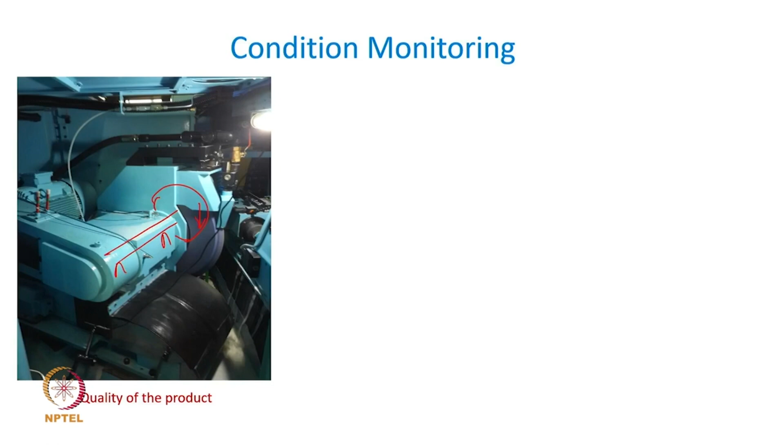The other example is of a defense equipment. This equipment has many mechanical parts: engines, transmissions, gearboxes, pumps, and so many critical machinery equipment inside, which if they deteriorate in their quality of operation, then the reliability of the mission being undertaken will get compromised.

So, from the reliable operation and the success of the mission standpoint, these vibratory systems or equipment acting like a vibratory system have to be kept in working condition or the most effective operating condition.

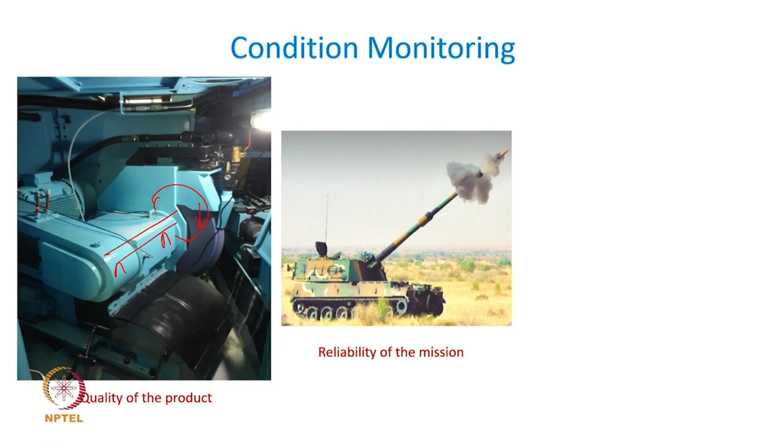So this is a domain within vibration engineering, where we may use, among other things, vibration as a significant and important parameter for keeping the condition of this equipment up and running, to the best of the possibilities.

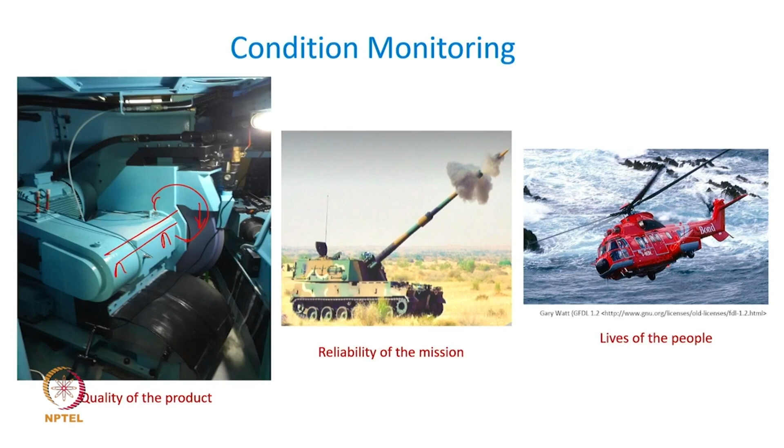Now, what are these condition monitoring parameters which we can use for ensuring the machinery or equipment works perfectly? There are various parameters, like an aural parameter. For example, in an automotive engine, if you take your vehicle to the garage, the mechanic will immediately start it and look for some audio symptom, listening to the sound coming from the engine to detect any anomaly in the system. So sound is one parameter.

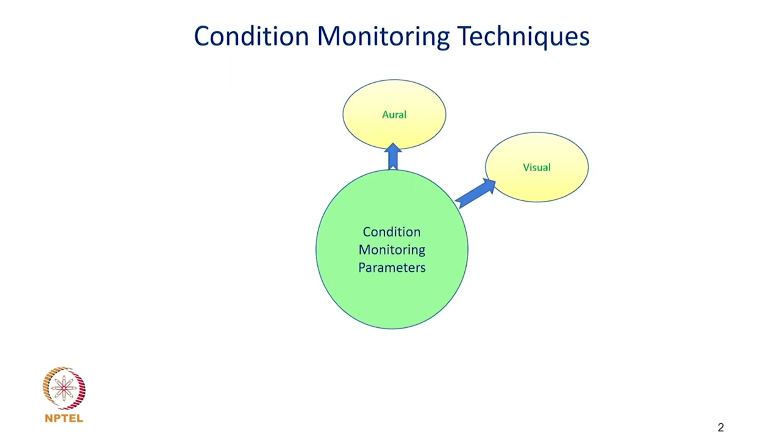Sometimes some equipment have the possibility of detecting damages using simple visual observation, like using boroscopes in the heat exchanger or furnaces, where visual observation is good enough to maintain the condition.

The other is temperature. So if you take the bearings, the temperature will tell you whether the condition is appropriate or deteriorating. Wear debris, either from the bearing oil or from the gearbox oil—if you drain out the oil and look for the debris particles, that can indicate whether the wear is abnormal in the gearbox or in the bearings, and that will tell us the health or condition of the equipment.

Vibration is one of the most convenient and important diagnostic parameters, where the health of the machinery is diagnosed based on the quality of vibration. We will discuss this parameter in more detail.

But there are of course other parameters such as acoustic emission, or operational variables such as pressure and temperature of the equipment. Sometimes speed, for example in power stations, the vacuum in the condenser, or the power being generated, are operational variables used for tracking the condition of the equipment. So these are just a glimpse of various parameters which can be made use of in monitoring the health of the equipment.

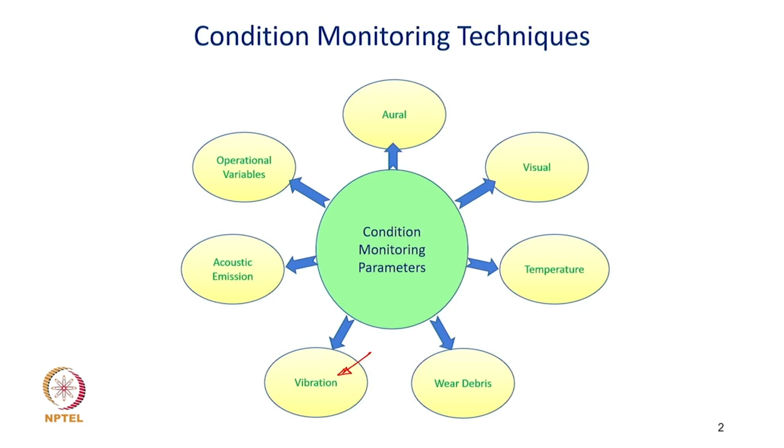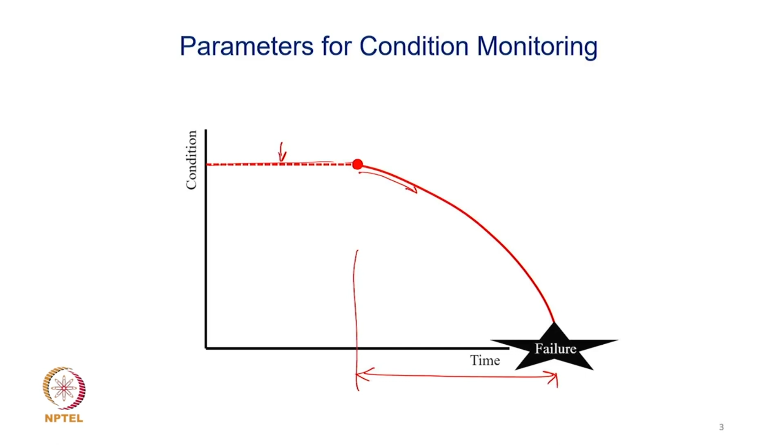It is possible that by employing some of the parameters we have seen in the previous slide, one can keep track of this deterioration. So among the total time or opportunity for corrective action, if you rely on noise, it may be too late to figure out the damage.

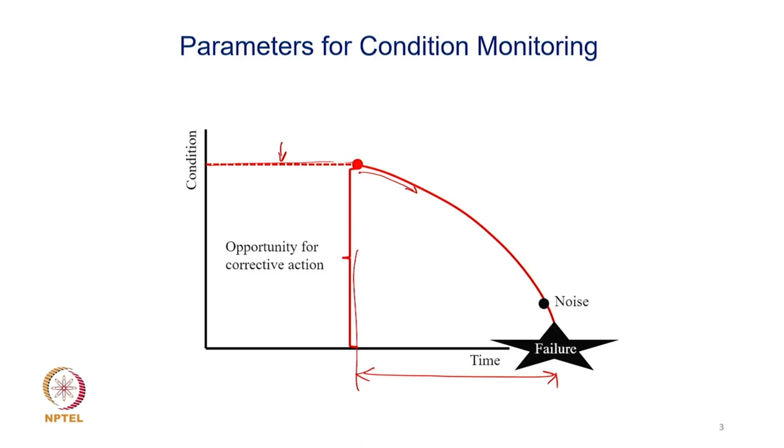The noise starts emanating generally a little later in the progression of the damage, compared to other parameters such as visual inspection, temperature changes, and maybe lubricant analysis for wear debris particles or lubricant quality.

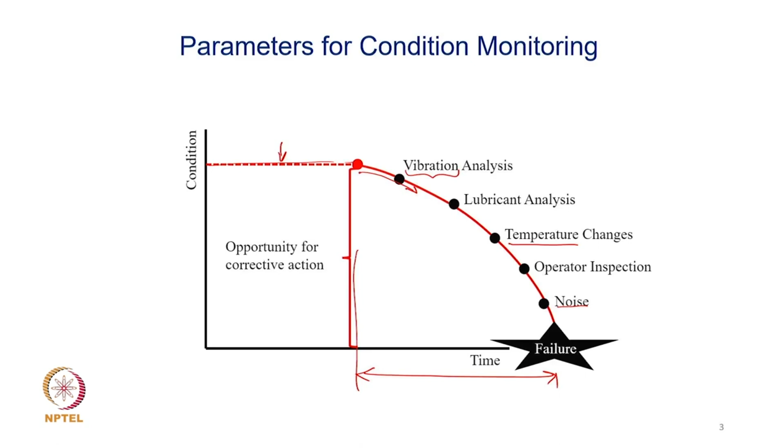But it has been observed that vibration is a parameter that gives you early warning symptoms of any change in the condition of the equipment, long before temperature shows up or long before noise gives its indication. So in general it has been observed that vibration as a parameter is an important one to track the condition of the equipment.

Now let us focus on how vibration is going to give me an idea about the degradation or deterioration of the condition or health of the equipment. I am just taking a simple example of an electric motor.

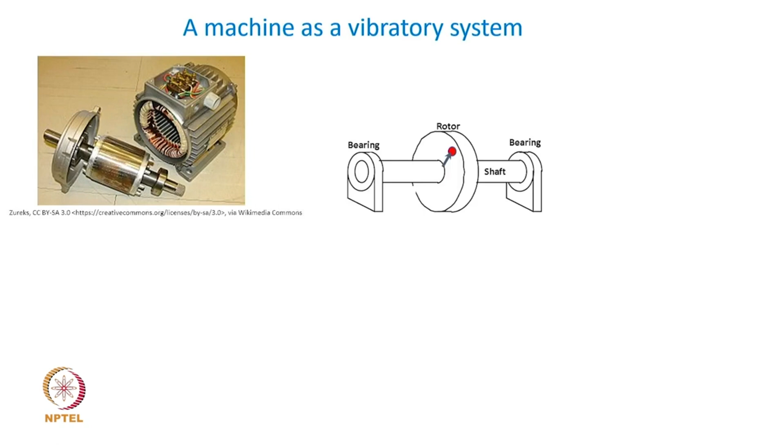This electric motor has a rotor, and the rotor is supported on two bearings, and this rotor spins inside a stator winding, and these bearings basically support this spinning rotor. So as a vibratory system, this rotor can be treated like a spinning shaft supported on bearings, and we know that a simplified way to represent this is in the form of a vibratory system.

So a shaft plus a rotor, if the shaft is big enough in terms of its diameter compared to its length, can be treated like a rigid one without any deflection, and the bearing stiffness can be treated as the spring element in the vibratory system. The damping in the bearings can be simulated or assumed here as the dashpot element for our typical single degree of freedom vibratory system.

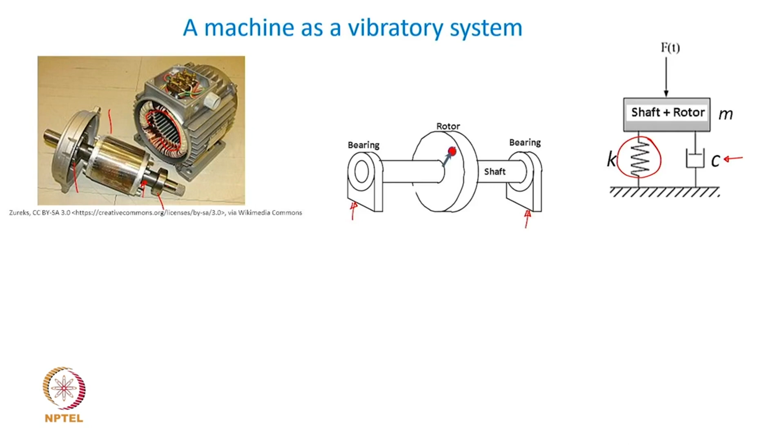The inherent unbalance in this entire rotor can be the excitation force to the vibratory system. So the force acting on the rotor is going to be the rotating unbalance in the shaft. In addition to that, there will be magnetic pull generated because of its operation in the stator winding. But in general, we can treat the excitation force as coming from the rotating unbalance.

Now, if this is your vibratory system which has certain stiffness, mass and damping properties, I can write the governing equation of motion for this vibratory system, as we have done many times now: m x double dot plus c x dot plus k x equal to f of t. Now, when things are going fine and everything is working all right, the system is in the best of its health and condition, this equation describes the dynamics of this particular system.

Now, we would like to look at what will happen if the condition deteriorates, but before we do that, we know that if this f of t is the excitation coming from the rotating unbalance case, then the response is going to be given something like this.

You already know that the response to a harmonic unbalanced excitation force is a pure harmonic signal as this, and the amplitude can be obtained from the parameters of the vibratory system as well as the excitation system properties like the unbalance. But this is going to look like a healthy condition vibration of the rotor, which I can measure by recording the vibration of the shaft coming out from there.

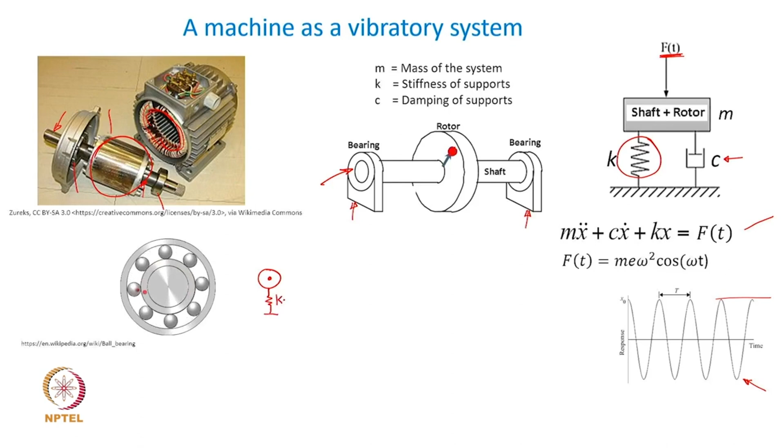But let us look at this system a little more closely. One of the most common elements of this vibratory system which generates faults or deteriorates its condition is the bearings. So if I consider one of the two bearings here, it is possible to see that this rotor is supported by the bearing, which I am defining as the spring I have used here.

Now this bearing itself is going to have a very little or minor fluctuation in its value based on the ball position. So if the balls are located like this about the vertical gravity line, then there will be some stiffness based on the ball positions.

This happens all along the circumference. But if this ball comes to this central position and the other balls are located like this, the stiffness of this bearing changes. In short, the stiffness of the bearing is going to fluctuate based on the position of the orbiting balls, and that small fluctuation in bearing stiffness creates excitation to the vibratory system.

How is that going to happen? We all the time assume that the bearing stiffness is constant, but I can use what is known as the varying compliance effect of the bearing. There is some mean stiffness value, but there will be some very little perturbation or fluctuation in the stiffness value. So there will be some delta k, which might fluctuate with a certain frequency omega f. So instead of constant k, I am going to have a varying stiffness, equal to f of t.

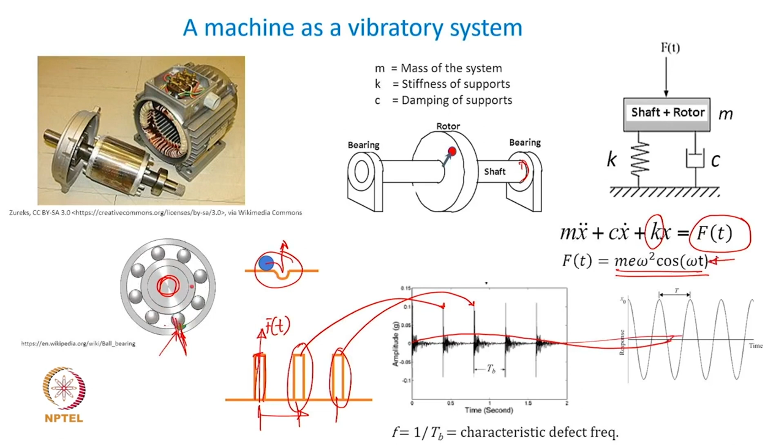So what is going to happen because of this? The response is going to be impulsive for a short period of time when this particular impulse acts. Each of these impulses corresponds to each passage of the ball through the localized defect. Therefore, in general the response could have been a harmonic response because of the rotational unbalance, but now that gets modified into the form of an impulsive, high frequency vibration response.

Because the geometry of the bearing is such that the time gap between successive balls hitting this particular local defect is related to the geometry of the bearing, this repetition period after which these impulses are generated can be obtained from the geometry of the bearing, and it's called the characteristic defect frequency. So by looking at the time domain data from the measured vibration signal, one can easily identify whether the bearing is healthy or not healthy.

The point here is, you still have the same basic vibratory system being modeled, and some parameters of this vibratory system, mostly the stiffness or the excitation function, will get altered by the presence of many of the mechanical defects which typically appear. So this is just one example of a rotor bearing system as a vibratory system.

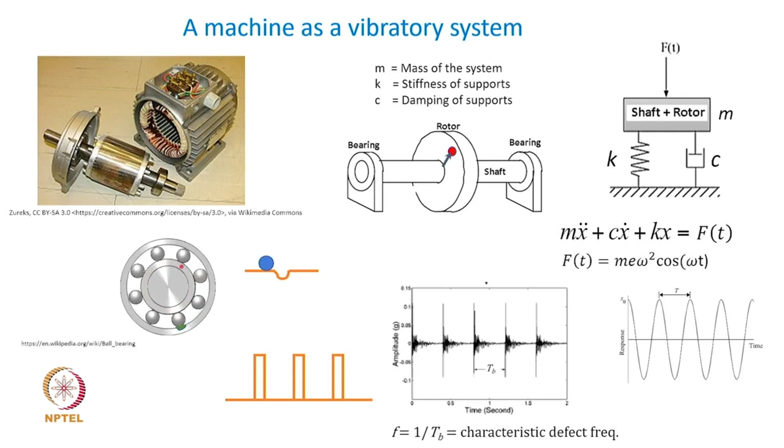How condition deterioration in one of these elements of this vibratory system generates a different kind of vibratory response, and by detecting the differences in the response, one can identify if there is any fault and what type of fault it is.

The other example is that of a gearbox or geared rotors. You know that the gears are basically teethed elements engaging with each other and transmitting the torque and power.

So if you consider one such pair of gear teeth, they are going to engage all along from the tip of the gear tooth to the root of the gear tooth. So it so happens that depending upon where the teeth are in engagement, whether at the tip of the tooth or at the root of the tooth, the stiffness is going to be different.

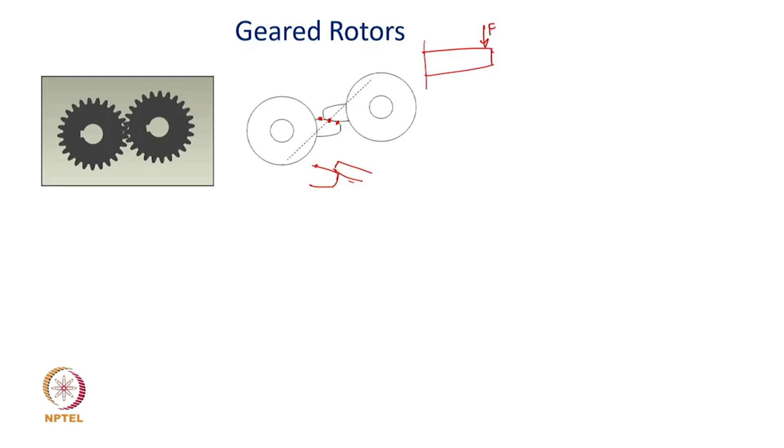It is very simple, because if you consider the tooth to be a cantilever, if you apply the force here, the corresponding displacement is going to be larger. But if you apply the same contact force closer to the root of the tooth, the displacement is going to be much smaller as compared to when the same force was acting at the tip of the cantilever.

So this force to deflection relationship generates the stiffness, which is not going to be a constant value based on the engagement of the tooth at different locations all along the contact profile or that length on the flank. This effective stiffness of the tooth is going to be different at each instant of time during the entire contact cycle. So basically, you may consider this contact to be in the form of a stiffness and damping.

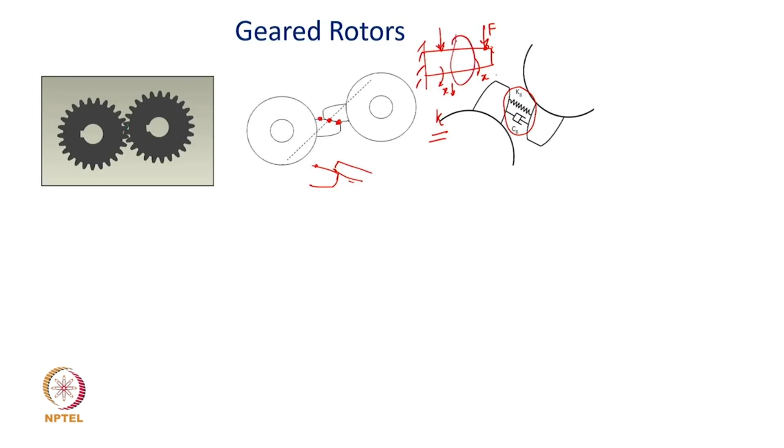Damping will come because there is always a sliding action between the two teeth, as we already know from the kinematics, and that friction, if lubricant is not there, will give Coulomb friction damping. If lubricant is there, then there will be some viscous damping due to the sliding motion, except at the pitch point.

Now, the point is, because the stiffness of the tooth is different at different times, that stiffness can still be modeled like a gear mesh stiffness kg, and then I can write the governing equation of motion of this particular geared rotor system. This is going to be in theta terms, but I am just giving a representative equation.

The most important part in this case is that since the contact point is sliding from the tip to the root and back again, this stiffness is not going to be a constant stiffness which we typically use for our general linear vibratory system. The k is not going to be constant, it is going to be a function of theta or time, quite similar to the bearing case where the stiffness was not constant.

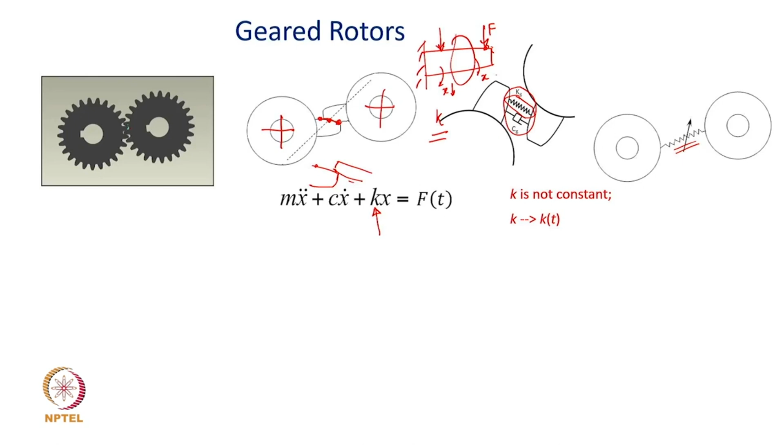It can be shown, though this is not the point of discussion, but you can find out from literature that during one contact segment - meaning when one pair of teeth starts engagement until the contact cycle completes - if the contact ratio is more than 1, the stiffness of the gear teeth changes in this way, over one cycle.

Because of this, as discussed in the previous case, this k is not going to be constant. You can treat this k to be a constant term, a mean value, plus some fluctuating component, which is kt, the fluctuating component. So if I keep mx double dot plus cx dot plus this constant part on the left hand side, then the right hand side is going to be this kt into x, which is basically arising out of the fluctuating or varying part of the parameter k, and that is why this system is called a parametrically excited system.

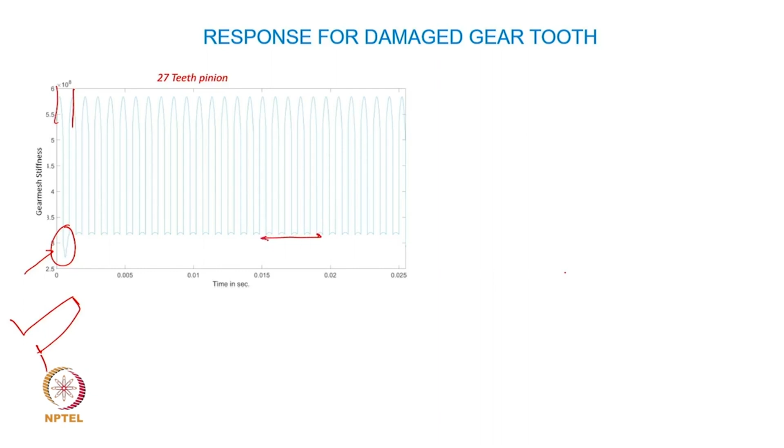If a gear having 27 teeth has a fatigue crack on one of the teeth, that crack can generate a dip in the overall mean stiffness value, because the crack makes the tooth weaker. So even if only one tooth has a crack or any flaw, the mean stiffness level drops at that particular engagement cycle of that tooth, while the rest of the teeth are perfectly healthy and generate the kind of stiffness variation discussed earlier.

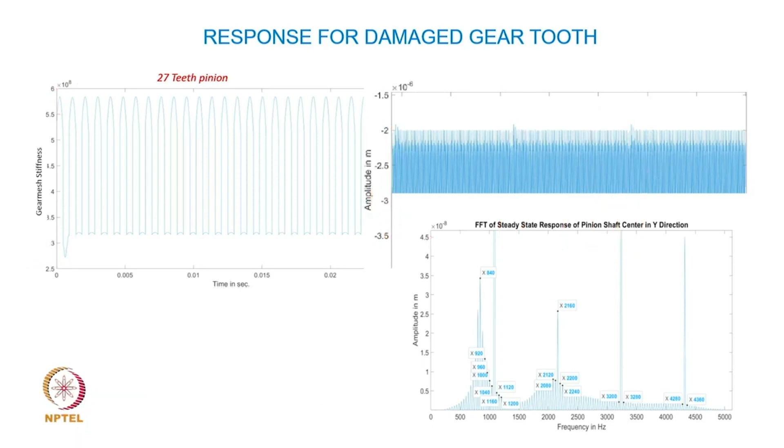Now if you take the Fourier spectrum of this time domain data, you get the frequency domain signal, something like that. Don't worry too much about how to get that FFT - some of you might already be aware of how to get the frequency spectrum from time domain data. But the point is, these periodic perturbations or signal changes that happen because of the defective teeth generate a peculiar vibration response pattern which is observed in this frequency spectrum.

If the defect is not there in the teeth, the general vibration signal would look like these frequencies only, and ideally this is how the spectrum will look like. But because of the defect in some of the teeth, you can see that these kind of sideband vibration frequencies will appear, which can be used for diagnosing the health of the gear.

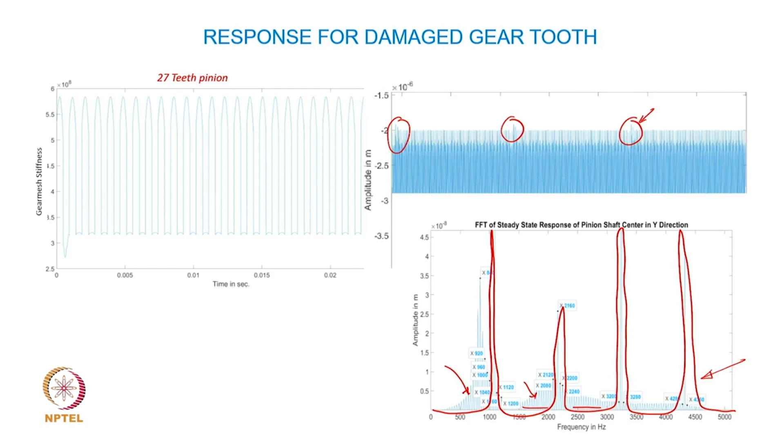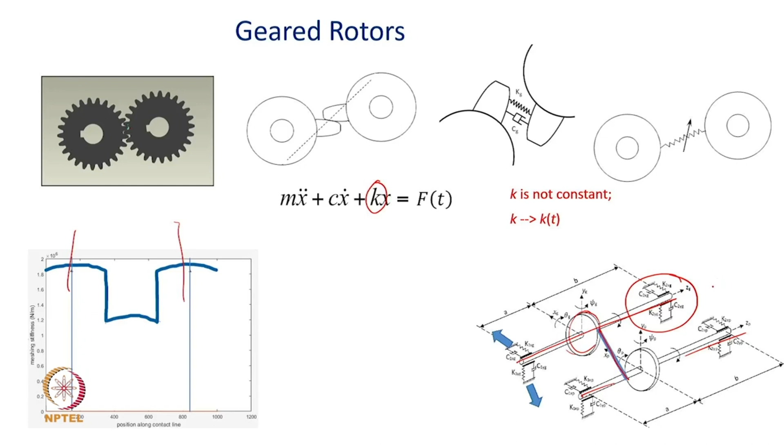Now the whole purpose of telling you all of this is not to teach you details of the health or the diagnostics or the dynamics of the geared rotor, but to show you a glimpse of how vibration as a signal feature can help diagnose the deteriorating condition of a vibratory system like a gearbox. This in no way demonstrates or discusses in detail the dynamics of the vibratory system of a gearbox, but only shows how vibration, which we learned through elementary theory of vibration, can be extended to study the dynamics of complex mechanical vibratory systems, and that can be used for diagnosing the health of mechanical equipment.

The other example I would like to give you is a fatigue crack. A fatigue crack can appear on the shaft due to large fluctuating stresses, bending stresses in the shaft, because of flexible shafts being used with high speeds and higher loads, under an aggressive environment like high temperature conditions, and that creates a fatigue crack.

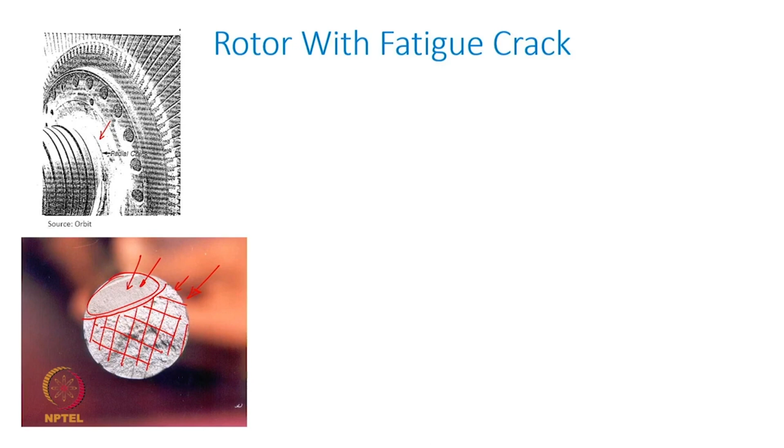When such a fatigue crack exists, at this particular cross section of the shaft, only this area is bearing the load. This part of the total cross sectional area does not contribute to the stiffness or load bearing part of the cross section. So only this area of the cross section bears the load, and therefore the stiffness in this localized cross section reduces significantly, creating a change in the stiffness value.

If you consider this to be a horizontal shaft under gravity loading, and this kind of crack exists in the cross section, as you can see in this exaggerated view, the crack will open the two areas and create an open area here, which means that only this area of the shaft is bearing the load. The crack is wide open.

This crack is assumed to be on the underside, and because of the tensile forces on the underside of the shaft, it will open the crack there. But when the shaft rotates by 180 degrees, the same crack will go to the top, but because of the compressive loading on the top side of the shaft, when the crack goes to the top side, it will get closed. This is shown here.

At theta equal to 0 degrees, on the lower side, this crack is going to be completely open. But the same crack, when the shaft rotates by 180 degrees and goes to the top side, the compressive loading on the cross section will close the crack and the entire surface will bear the load.

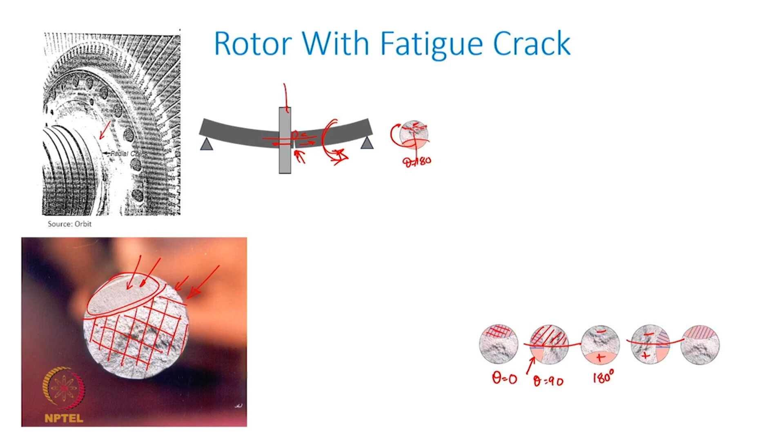If you consider this to be 180 degrees, the rotor is always rotating in this direction, and after every 90 degrees of rotation, the crack area will continuously open and close. At 180 degrees, where the crack is on the underside, the crack completely opens. With further rotation, half the crack, which is under the compressive region, and the other half in the tensile region, half of the crack is going to be closed, and then it is going to be completely closed.

Now, using this to show how the stiffness of the shaft changes as the crack changes orientation as the shaft rotates: at theta equal to 0 degrees, the crack is completely closed, like an uncracked rotor stiffness, meaning the effect of the crack on the stiffness is not there at all. If the crack is half open and half closed, the stiffness drops to a certain value, and when it is completely open under tensile loading, the stiffness drops to a significantly low level. As it rotates further, half open half closed, it has a certain stiffness value, and then again back to completely closed condition, the stiffness returns to the same as the uncracked shaft.

The point is, had the rotor been without any crack, an intact rotor, the stiffness does not change at all. It remains constant irrespective of the rotational position of the shaft.

You can agree that if the shaft is uncracked, it will have the same stiffness all through as it rotates, so the stiffness does not change. But because of the crack opening and closing continuously and gradually during a rotation, the stiffness of the shaft fluctuates like this, which again brings me back to our governing equation of motion.

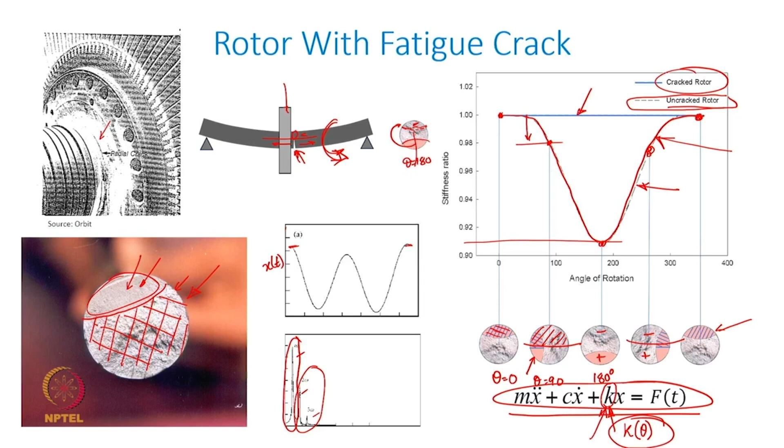This is all to show you how every mechanical vibratory system is defined or characterized by a governing equation, and the majority of mechanical faults somehow either modify the forcing function or the parameters of the vibratory system like stiffness or damping. But 90+% of the time it is the stiffness which gets modified, and that modified stiffness generates a slightly different kind of vibratory response.

When you compare the original healthy condition response with the changed vibration response, the difference basically will tell you what could be the reason. First, it establishes that there is a deterioration in the condition of the equipment, and then by analyzing that signal through a variety of means, one can identify the possible fault in the system.

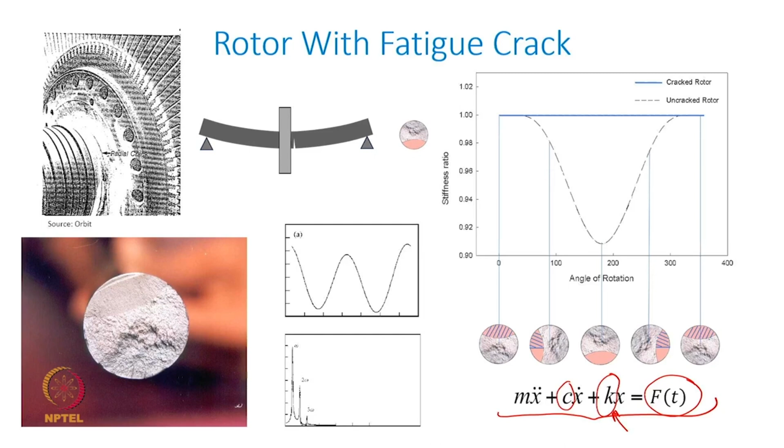But most mechanical systems, when they undergo some deterioration in their condition, will give rise to a specific vibratory response which is characterized by certain parameters, and using those parameters one can diagnose the condition of the equipment. But at the heart of it, it again is the basic vibration theory at work.

So just to wrap up this part, there are of course n number of different kinds of faults in mechanical vibratory systems. We simply cannot get into the details of each one of them, and this particular topic has been taken just to highlight one possible application area of vibration theory.

So if there is increased unbalance, we know the first harmonic or rotational frequency related response increases. If you have misalignment, higher harmonics will appear because of the misalignment in the coupled shafts. If there is bearing wear, the response again would change in the form of a changed orbit plot. Rolling element bearings we have already discussed, and we have discussed how gear tooth damage will cause a different kind of vibration response.

And if the rotor, when rotating, is surrounded by a stator and hits and strikes the stationary part, there is going to be a peculiar vibration pattern generated. All of these will generate specific vibration symptoms which, if properly analyzed, can definitely point to a certain flaw, which is why this particular field is exciting and extremely dynamic. It is multidisciplinary, and a lot of research is still going on in increasing the robustness of the diagnostics.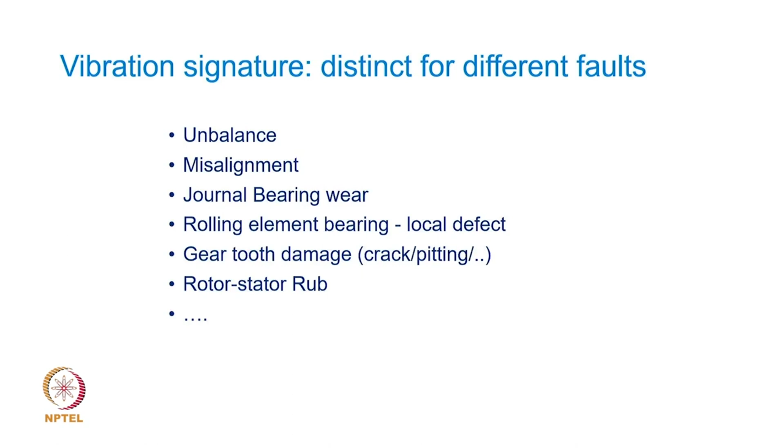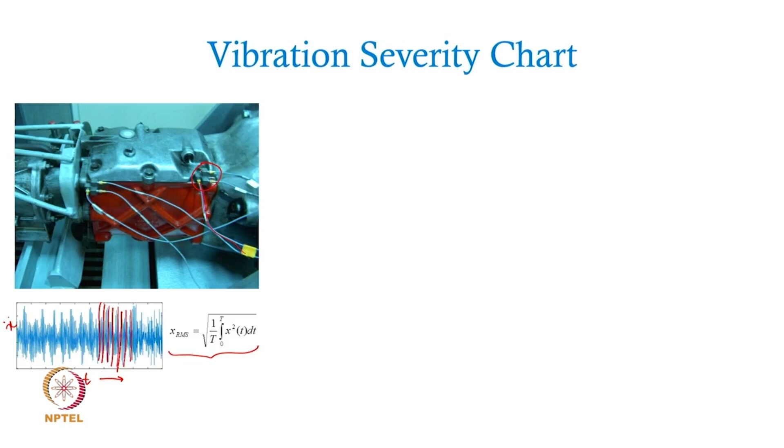Once the root mean square value of the vibration signal recorded on the equipment is obtained, then using the ISO standard one can categorize the equipment as operating in healthy condition or not. Depending upon the capacity of the machine, there are prescribed values of the vibration velocity RMS.

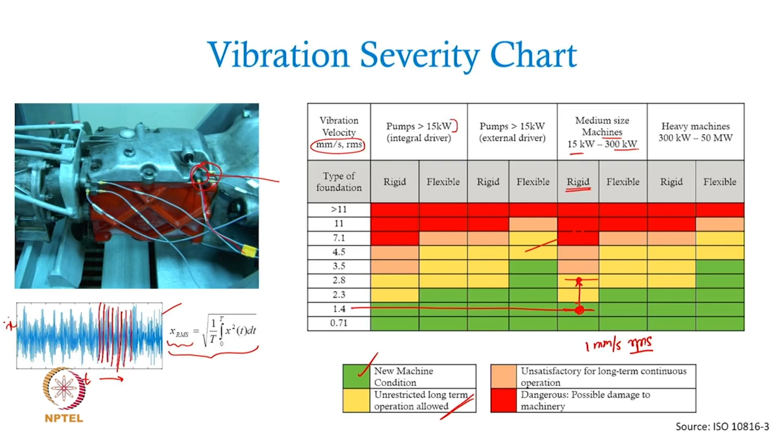So the summary of this lecture: we discussed how various physical parameters can be used to monitor the health of machines, and among these, vibration has been considered one of the most promising parameters. We deliberated as to how different machine elements such as bearings, shafts and gears produce vibrations that are very peculiar to the defect they have, so the vibration response change can be directly correlated to a fault brewing up in the system.

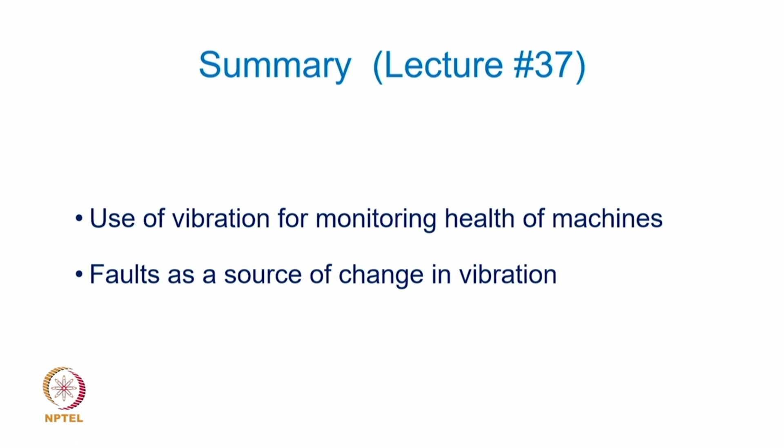And that is what we discussed: faults as a source of change in vibration, and a careful deciphering of the changes in the vibration signature can act as a diagnostic approach.

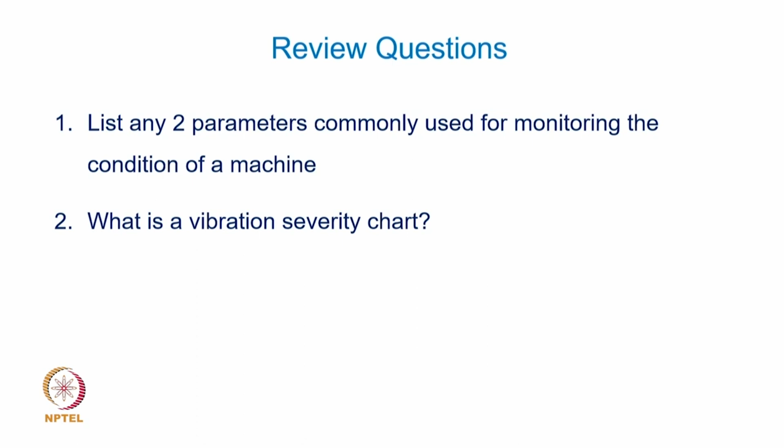The review questions based on today's lecture, and here are the answers.

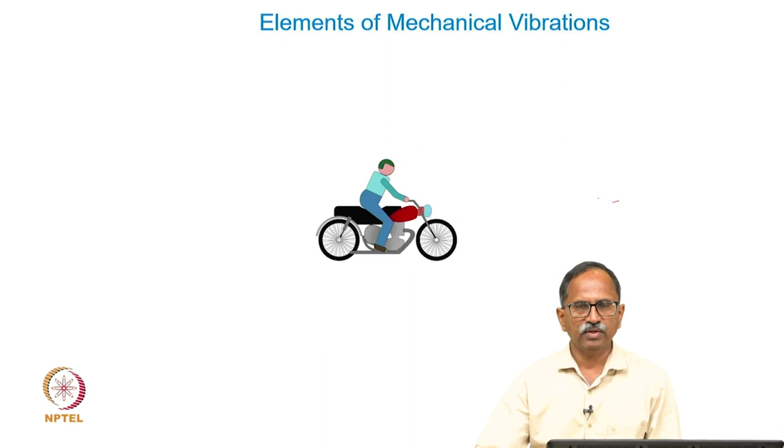So here we are at the concluding part of this course, Elements of Mechanical Vibrations. During the last 12 weeks or so, we had a sufficiently in-depth understanding of the fundamentals of vibration, and what we are going to do here is take a very brief recap of all that we learned in this course.

We started first with a simple single degree of freedom system model of a given vibratory system, limiting ourselves to just a single degree of freedom for a given physical system. We explored how the governing equations of motion are obtained, how the natural frequency is calculated, and in addition, how the response to initial conditions is obtained. In that context, we considered a couple of interesting examples to drive home the point.

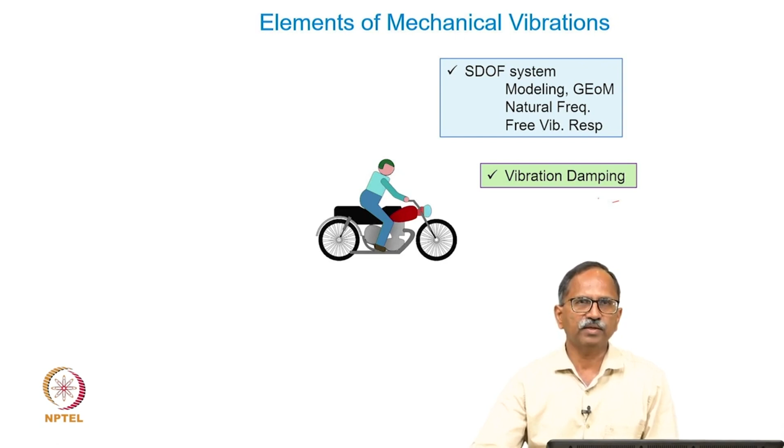Once the basics of the single degree of freedom system in the case of undamped free vibration had been explored, we looked at how damping plays its part in attenuating the vibration amplitude over time. In that context, we considered practical damping sources, such as a viscous dashpot, typically used in automotive systems.

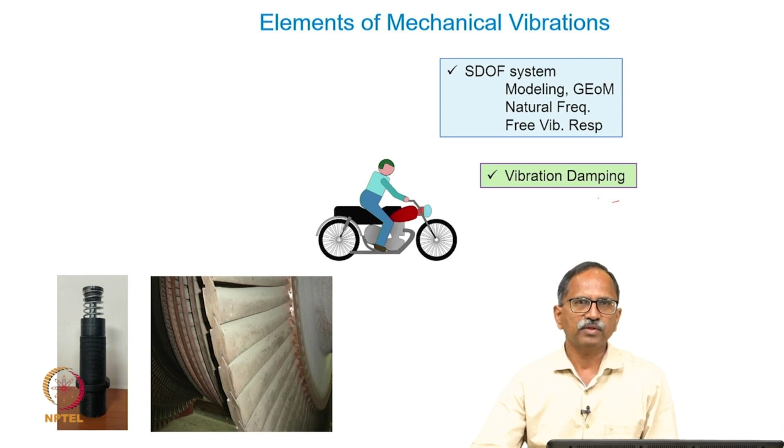In a steam turbine case, Coulomb damping plays its part in attenuating the vibration response. Once different damping models were considered, we shifted attention to response to arbitrary excitation, understanding how a short duration, arbitrary or transient excitation can be accounted for in finding the subsequent vibratory response. We often considered the vehicle as our physical vibratory system and simplified it as either a single or multi degree of freedom system.

After discussing free vibration response both without damping and with viscous damping, we shifted attention to forced vibration, investigating harmonic excitation as the primary source of excitation for a practical vibratory system. We extended this understanding to investigate how the response to periodic excitation can be obtained.

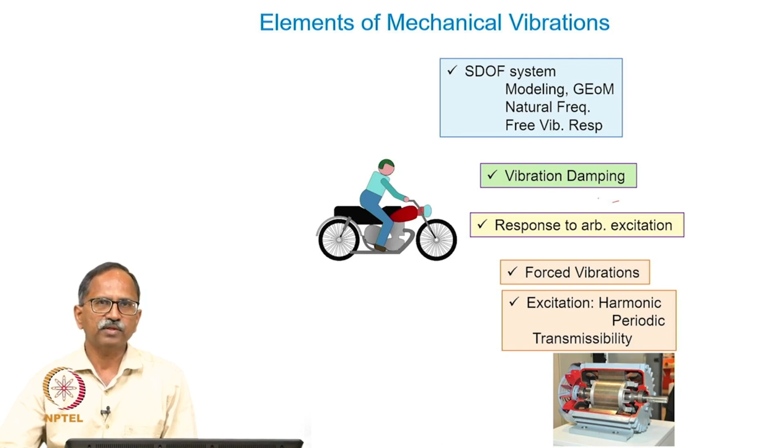We also explored the concept of transmissibility, both displacement and force transmissibility, and understood the relevance of tuning various parameters to derive the best transmissibility condition, minimizing the transmitted force or displacement to the target. Having explored the single degree of freedom system and its response for a variety of excitation sources, we shifted attention to a 2 degree of freedom system.

We found how the same vibratory system, if we want to capture dynamics missed when considering only a single degree of freedom system, can be obtained. Suitable governing equations of motion for a 2 degree of freedom system were formulated. The concept of mode shapes was introduced, followed by the concept of vibration absorbers.

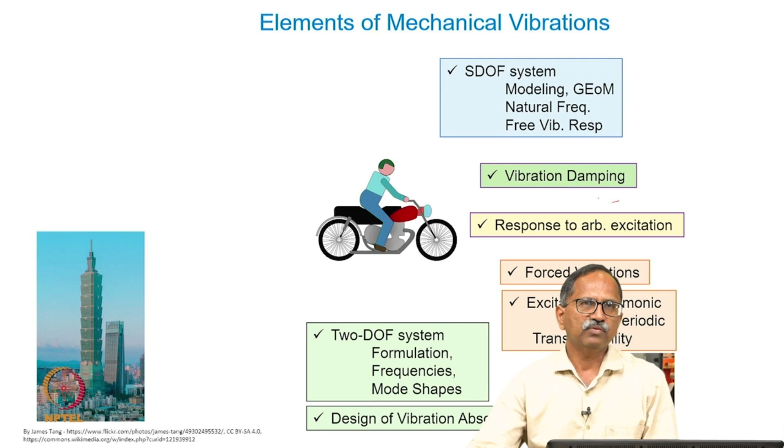We took a couple of practical examples of how these vibration absorbers are used in practice, either in civil structures or in mechanical automotive systems.

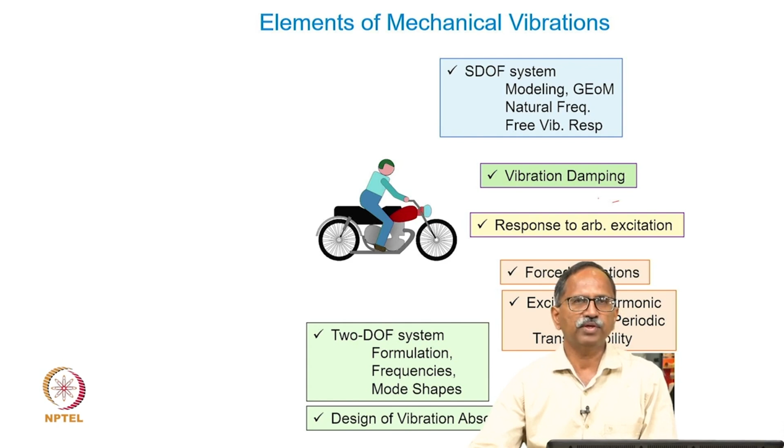Having considered a 2 degree of freedom system, mode shapes and other aspects, we started exploring how a multi-degree of freedom system can be modeled as a set of governing equations of motion which are typically coupled. We understood how a system with many degrees of freedom can be modeled as a vibratory system.

We also explored how numerical methods can help us model similar systems with much more accuracy compared to a lump parameter model. An example of Holzer's method or the Myklestad method for finding the natural frequencies and mode shapes of a typical complex structure was discussed.

In an example of a music box cantilever beam, it is almost indispensable for us to use numerical methods rather than lumping the parameters.

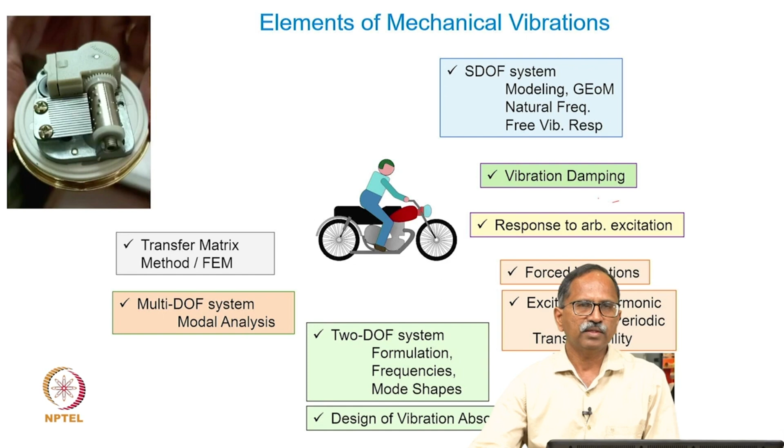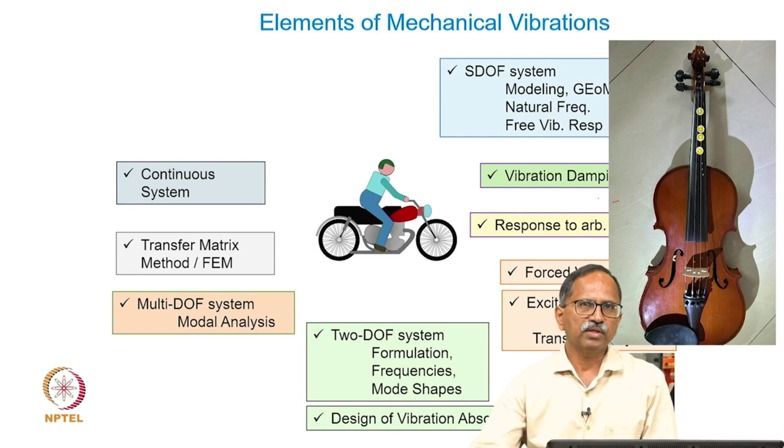This was followed by continuous systems, where we considered the entire system or a continua as a distributed parameter system, with mass and stiffness properties as a continuous function of the spatial variable. We considered the examples of stretched strings, vibrations of a bar, and that of a beam.

We understood how the differential equations of motion for such continuous systems are characteristically different compared to the lump parameter model. The last topic was condition monitoring, where we discussed how the presence of typical mechanical faults in a vibratory system changes the vibration behavior and response character, and how based on differences between healthy and defective conditions, the change in vibration behavior can be related to the type and severity of the fault.

Vibration as a phenomenon has been discussed at its elemental level, and in a short course of just 12 weeks it is difficult to do justice to all aspects of the vibration phenomena. However, fundamental theory of vibration has been presented, and I hope by following these lectures you will be in a much better position to understand some of the main and important concepts of this wonderful field.